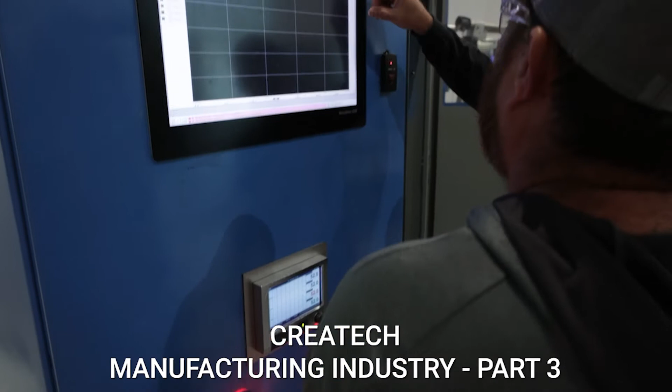I have been in manufacturing for over 35 years, so any day I get to talk about manufacturing, I consider it the best day ever.

I started out in manufacturing. I worked for a small company, well, maybe not so small. We made video games, home video games back in the 80s. So for those of you high schoolers, yeah, we had video games way before you guys. And I worked my way up. One of the other, I'll call it a video game company, we made flight simulators, actual aircraft simulators so that pilots could train on it. So that was about a $20 million video game.

I've been all over the manufacturing industry, and I am happy to see so many students on this meeting. I'm guessing you're here because you're interested in manufacturing as well. One of the things we're very interested in is getting people in love with manufacturing as we are, so you can come work with us. We want you guys to have a career path to manufacturing. Again, I appreciate it.

One of the interesting things about manufacturing is it's a very diverse industry, and you're going to see that by the diverse panel of manufacturers we've put together. And not just manufacturers, we also have somebody here from supply chain. Manufacturers could not do what they do if it wasn't for the supply chain folks, so we like to make sure we represent supply chain people as well. We couldn't do what we do without them.

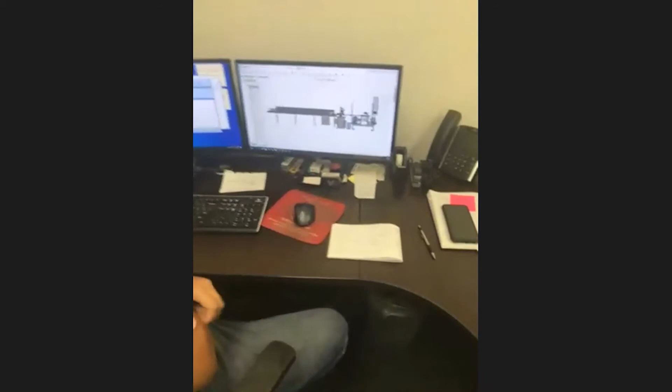So I'm going to walk you through our process. This is our engineering manager, Marshall Hurley, and one of the things that Marshall and his team of engineers do is use SolidWorks.

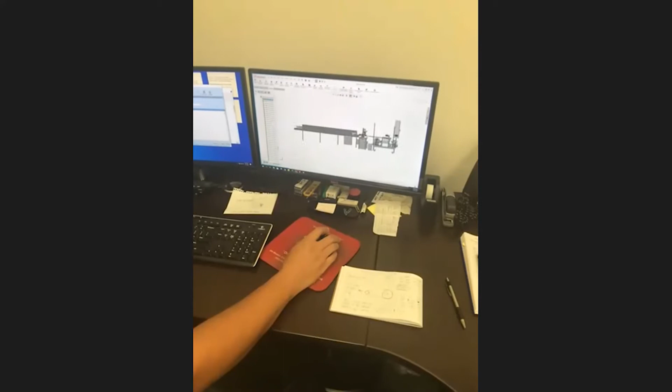I know some of you on the call are studying SolidWorks in your high school classes. We use SolidWorks to design machines. This is a machine that's just about built, but Marshall can rotate this a little bit so you can see it. If you're not familiar with SolidWorks, it's a 3D modeling program. In this view you can see it in two dimensions, but we're able to zoom in and look at it from many different angles.

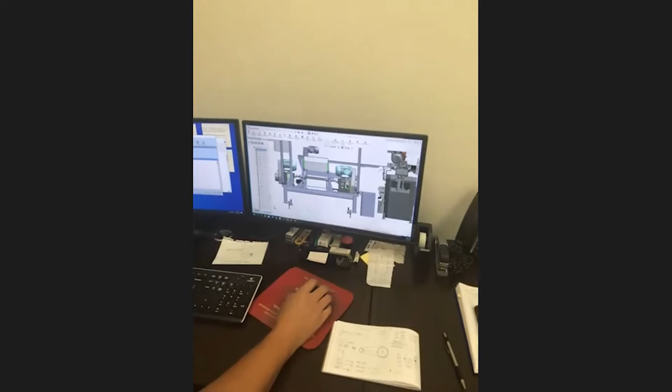So this is the drawing board. I'm going to walk you out into the plant in a minute so you can see what this machine looks like when it's completed. We employ about 16 people here, in a shop with about 20,000 square feet.

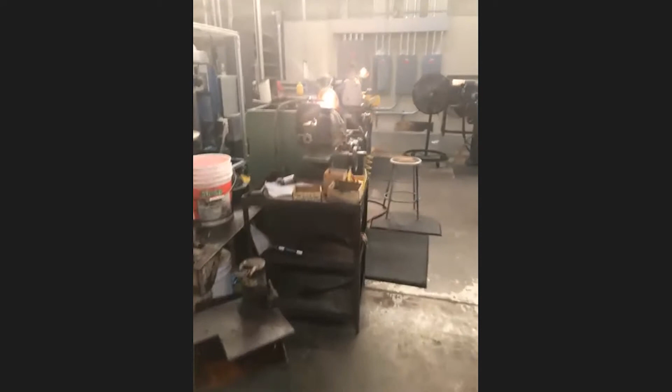I hope you can still hear me. I am out in the shop now, and we do a number of things. Let me show you a little bit of a panoramic view of some of our equipment. So here's some of our grinding equipment. Now, a lot of this equipment looks very old, but in actuality, it's used every day.

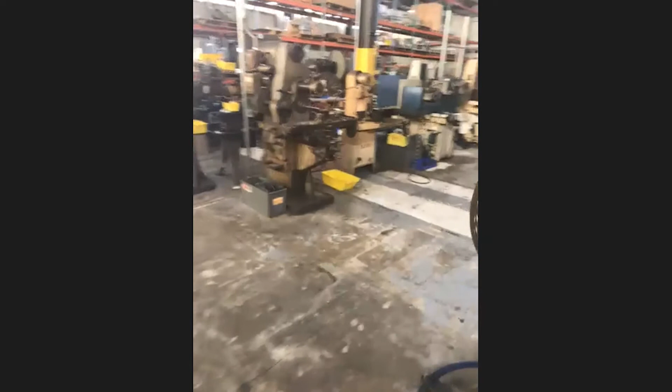Over here on this side of the plant are a variety of different small pieces of equipment that, again, are used every day to cut metal, to drill metal, to grind metal, all so that we can make custom machinery. We also utilize modern machinery, CNC machines. We have lathes and we have mills.

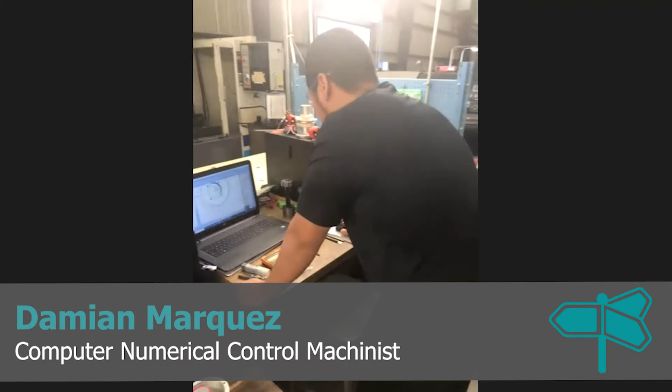I'm going to introduce you to somebody now, this is Damian Marquez. Damian is one of our young up-and-coming operators on all of the CNC equipment. He can talk to you a little bit about himself and how he got here and some of his training. So Damian, how long have you been here? I've been here for about 7 years now.

So you're a pretty young guy. How old were you when you got started here? I believe I was 18 and I was still in high school when I started here. And why did you decide to come to work here? Well, really I had no plan on coming here, but my father convinced me to give it a try. And to this day, I don't regret it at all. It's been pretty great for me.

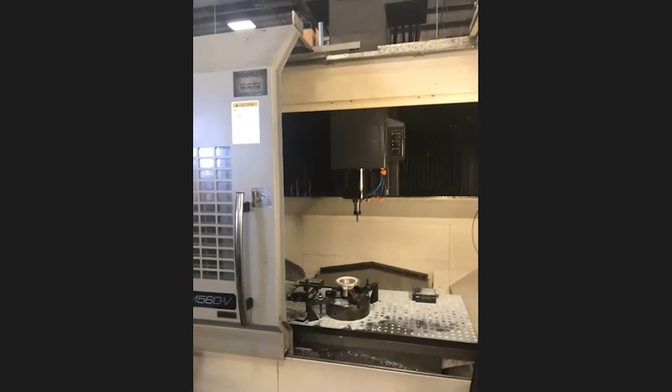Tell us a little bit about what you do. I'm the operator of a CNC mill and also a CNC lathe. You want to show them your machine? Yeah. Let's flip this. So right here is our CNC mill. You give them a zoom in on the part you're working on. All right, this is the part I'm working on right here.

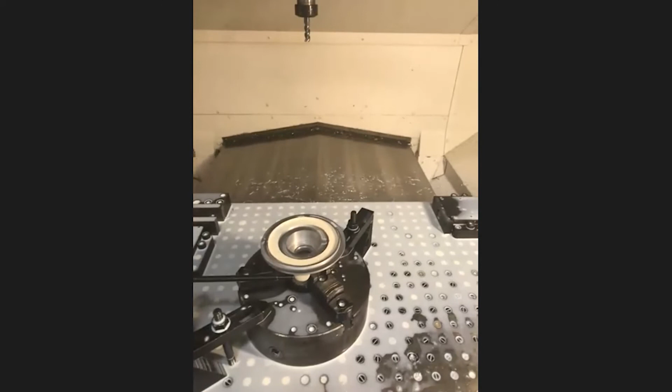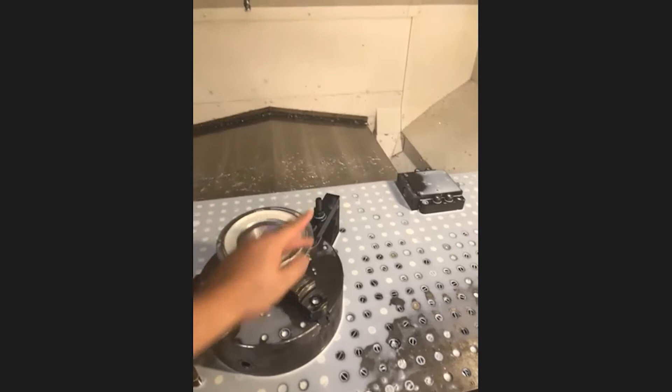Right here's our 3E cover, and I'm mounting it on right here on this chuck. So basically what it's doing, I have to come in and clean up all this area that you can see, and it's going to be fitted into another part, which is going to be our final product at the very end.

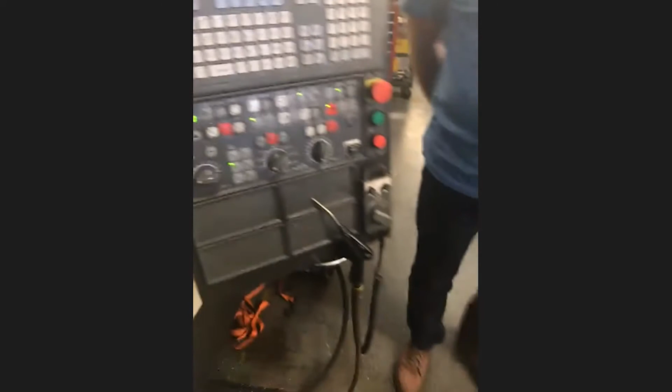So tell us a little bit about your training for this job. I've had several trainings throughout the time I'm here with several other machinists, and I also went to Polk College and got my certification in CNC milling through NIMS. Other than that, it's just sharing experiences with other machinists here and exchanging ideas to help grow as a machinist.

So do you think a career in manufacturing is a good career? Oh yeah, obviously, it's a great career. There's a high demand in manufacturing, and on top of that, it's really high pay too, which I know a lot of people like.

Anything else that you'd like to tell all the high school students out there about your experience? I mean, if you guys want to give it a shot out here in manufacturing, I say go for it. It's a really great career to go with.

Great. Well, thank you, Damian.

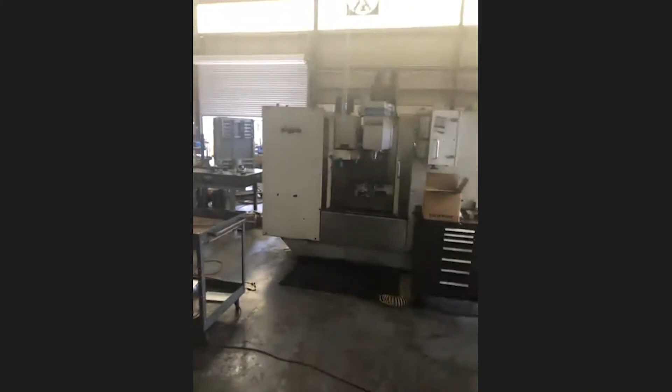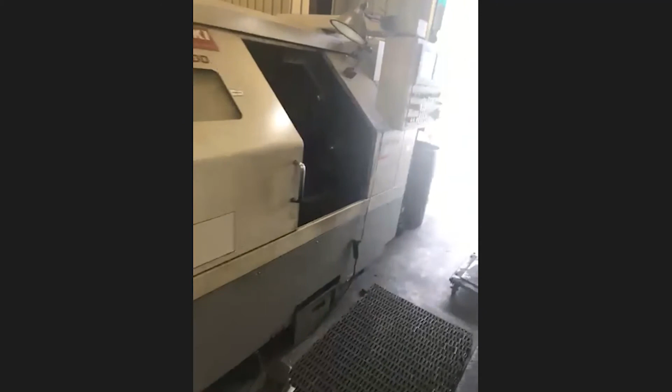Yeah, we have CNC mills. These are all computerized equipment that requires a fair level of skill to program them. And we make a lot of different parts with these machines. These parts go into our machines that we started our story with showing you the part that we were making. I'm now going to go over to that machine and you can take a look at the final product, or almost final product. We're in the process of fine-tuning this machine.

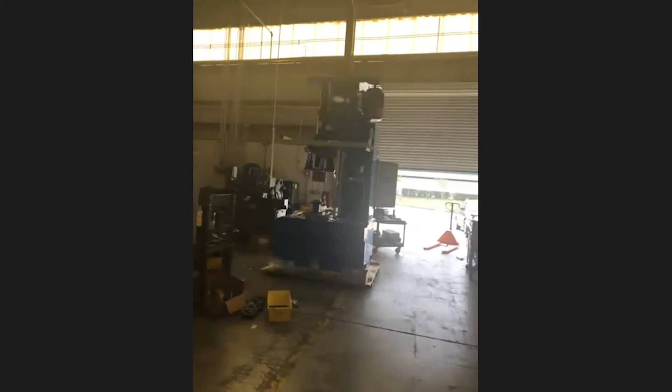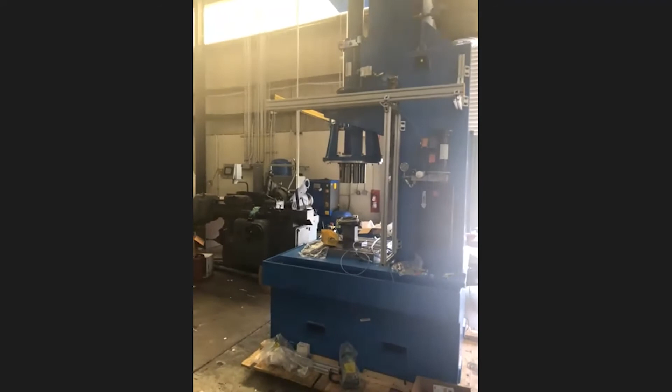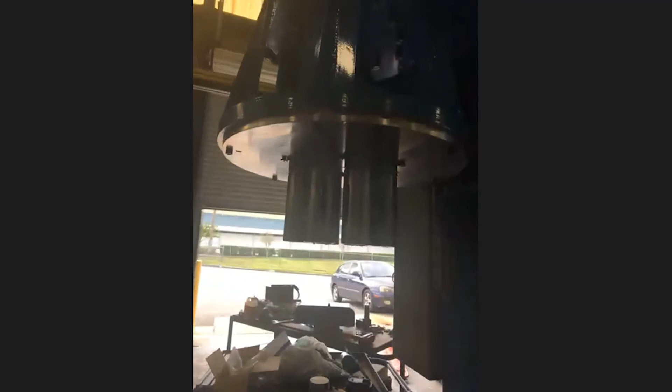On the way, I'm going to show you another big machine that's under production. This happens to be a machine that we're probably a few weeks away from being able to ship out. You can see this machine is very large. I'm guessing this machine's about 12 foot tall, and we use it to make wheel hubs. If you can see this spindle, there's about 8 spindles on this. They'll come down and put holes in this area on a part that goes into wheel hubs for large trucks.

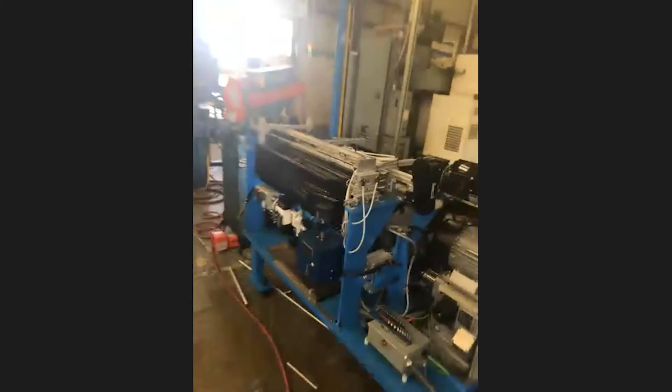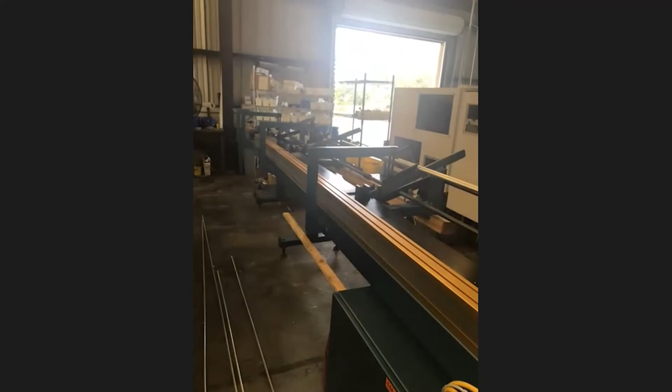So I'm going to walk over down to the machine that you saw the picture of and the part. This is the machine. It's a really long machine, about 23 foot long. It has an automated saw. I'm going to go down to the floor here for a second. There are these 12-foot bars that get fed into this part of the machine. They come through to the saw, and the saw cuts them to a length between 2.5 inches and 19 inches.

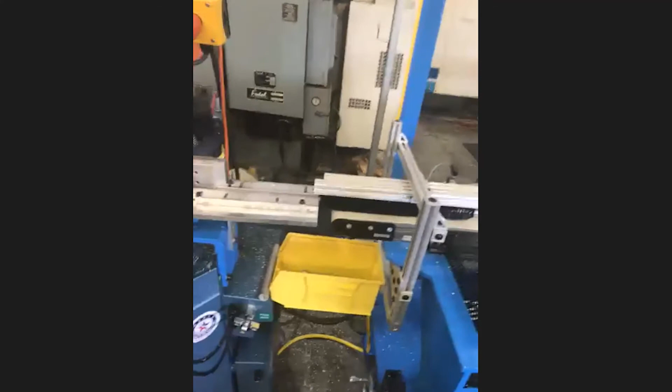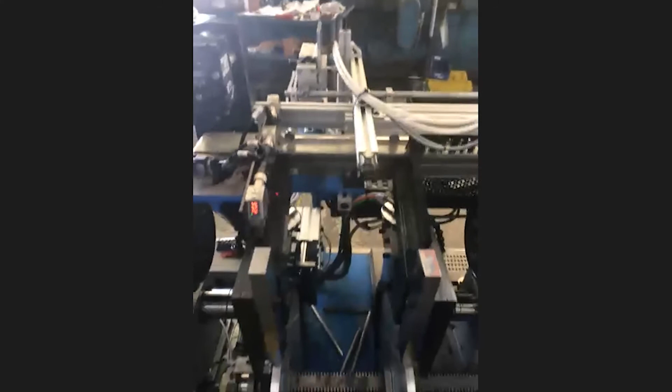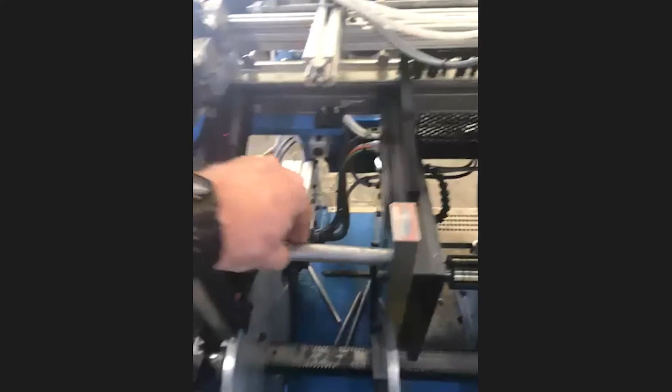They come along on a conveyor to this end of the machine, where they are kicked out into a hopper, a magazine. The magazine parts will roll down. I hope you're not getting dizzy from me moving around here, but the part will come down through this magazine into this wheel. This wheel will turn and go down to this area here, which is a tapping head where we put the threads in, and then they exit out into a barrel at the bottom.

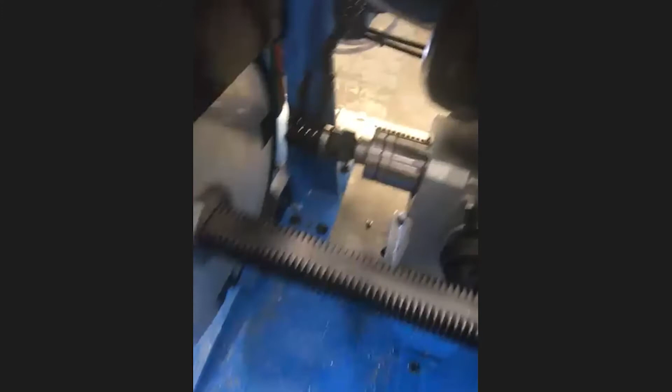So that's the machine. There's a lot of parts on this machine that we made ourselves in our shop. There are some things that we buy, but many of the things on this machine we make in our own shop with our own machinists.

We also have, another part of our work is the electrical panel system. I'm going to need some help opening this up. So here's the electrical panel that goes along with it. So if you want to be a machinist, we've got opportunities there. If you are more interested in programmable logic controllers and interested in machine programming, this is the kind of work we also do.

I'm at the end of my tour. I'm going to turn this back around to me. I'll tell you a little bit more about myself as I walk back into the shop, back into the office area. I hope you guys could hear me pretty well. We can.

I have an engineering degree from Purdue University. I got that a long time ago before I had a gray hair and gray beard. But I've been working in manufacturing my entire life. In fact, I ran a corrugated box plant for Packaging Corporation of America once upon a time in my career. I think there are many opportunities for careers in manufacturing, and I hope you will consider it as an opportunity for you to employ your talents, whether they be in engineering or if you'd like to come and be a machinist. They're all great jobs.